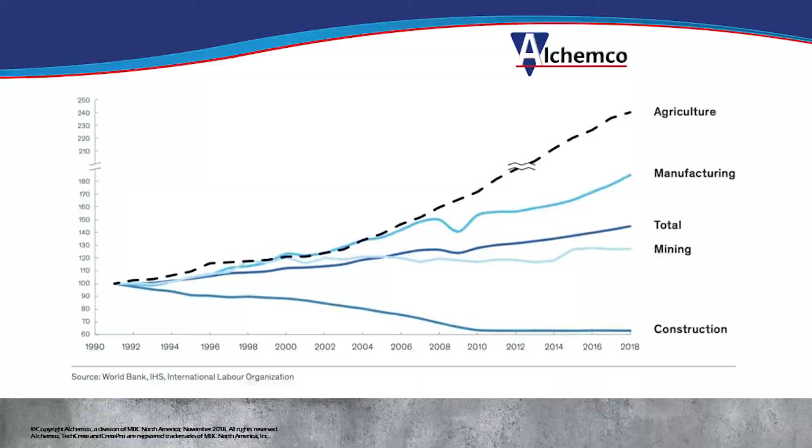Some industries like construction, it's not very good for us, as we can see here. This is very concerning. They did a study to try to understand why that was happening, and you guys are never going to believe why. It happens that construction has lower margins. This stuff of DOTs choosing the lowest bidder makes everybody work with lower prices, and if you have lower prices, you don't have margin to invest in innovation.

So no one is investing in innovation because there's no margin in the construction industry to try something new. And that's not the reality for other industries, as we can see here, agriculture or manufacturing. So construction loses a big opportunity to increase productivity, and it's very sad to see productivity going down after 30 years just because margins are so low that there's no room for innovation. It seems like I'm talking against innovation, but actually it's the other way around, I'm talking in favor of innovation.

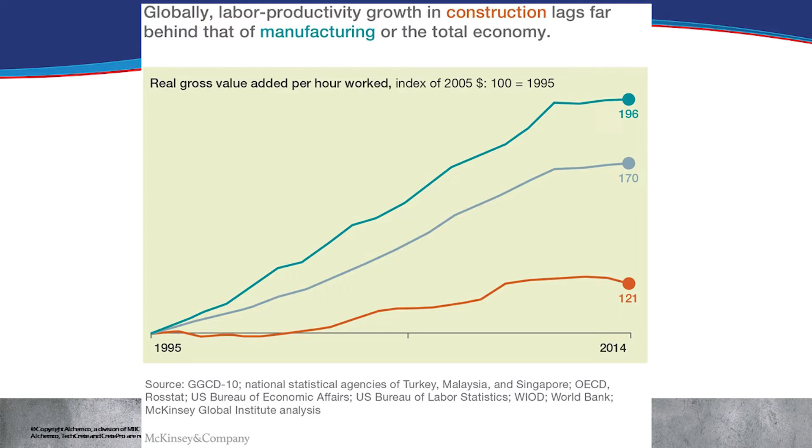Here, these are from the United States, and this one is global. So even in both scenarios, they're not good. Construction is also not good internationally.

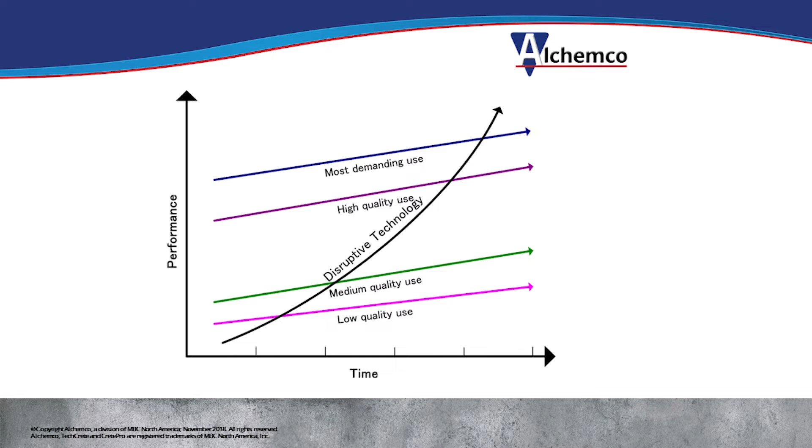Yesterday I mentioned about 2 types of innovation. I mentioned incremental innovation, so there's a first product that's low quality, then a second product that's medium quality, and the product gets better. We also mentioned disruptive innovation, where in the beginning it's completely different from the way we used to do business before, but now we got used to this new innovation.

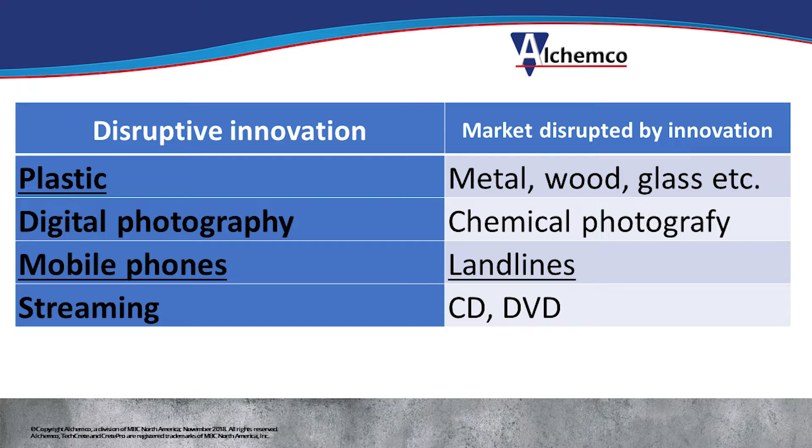Let me give you some examples. We had metal, wood, and glass, and then we created plastic, and there are way more utilities to do with plastic than we had before. And then, as you can see here, we have chemical photography replaced with digital photography, landlines replaced by mobile phones, and CD or DVD replaced by streaming. So when we talk about innovation, this is usually what we see.

It's very interesting with digital transformation, here are some numbers - either industry size or savings. Digital transformation is 100 trillion, e-commerce is 22 trillion, artificial intelligence over 15 trillion, climate change mitigation is 7 trillion, and a forever lasting concrete is 1 quadrillion dollars.

I'm not American, I'm not sure if quadrillion dollars exist, but I thought it was an easy, funny thing to say. When I typed 1 quadrillion into the presentation, it reminded me of Austin Powers saying 'one million dollars.' I just thought it was funny.

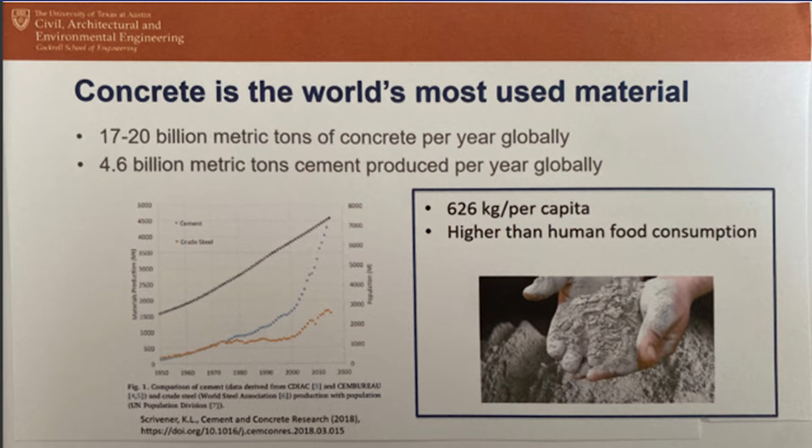Regardless, even though forever lasting concrete might not be worth a quadrillion dollars, concrete is the most used material in the world. So if we're able to make concrete last longer, we're saving taxpayers' money, making structures last longer, and we can use our budget to build new structures. That being said, let me start my presentation.

Alchemco produces waterproofing materials, spray applied waterproofing products. One of our materials won the Most Innovative Product award in 2020, just a couple years ago. We are a global company with projects in 75 countries over the last 45 years.

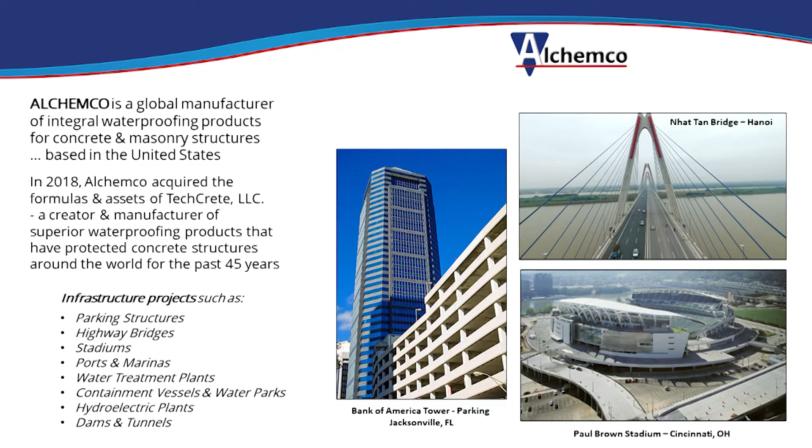A few years ago, in 2018, we bought a company from North Dakota, TechCrete LLC. That was the company that created this technology, back in the 70s, which we're presenting today. We have different types of projects, from bridges to airports to commercial buildings, all over the globe - water parks, aquariums, monuments. So we have a lot of different projects.

This is the technology we are part of with the ITD, this gel technology. I showed you guys yesterday the gel formation, and I have the video here for those who weren't here. This technology is a gel - a liquid that penetrates the concrete about half to three-quarters of an inch and forms a flexible barrier inside the concrete.

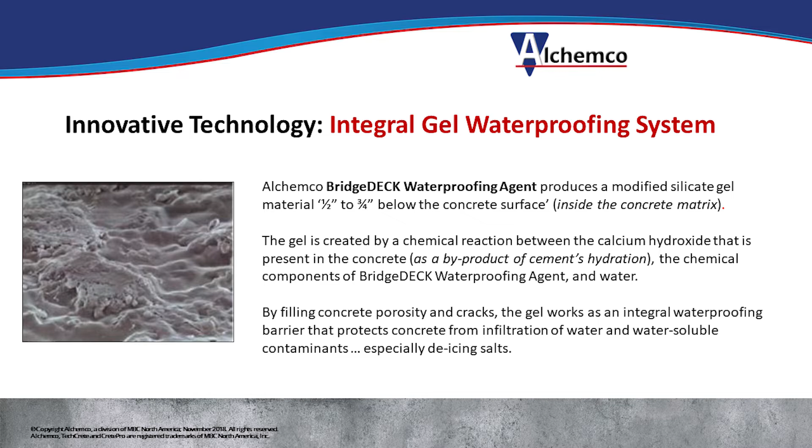A lot of the issues we face with other technologies happen because they sit on top of the concrete - that doesn't happen with this technology. And being flexible, being a gel, it handles thermal stress very well.

This is a video of the chemical reaction. If you want to see that live, we have material at our booth to show you the reaction. We use a clear cup to show the reaction that happens inside the concrete - as you can see, immediately when one product contacts the other, it forms this white gel, and this white gel is exactly what seals the pores, cracks, and capillaries of the concrete.

Often when we talk with DOTs, they have a bunch of different questions, as our technology is not a silane, not an epoxy overlay, not a methacrylate - it's a technology they don't know where it fits. So here are a few of the questions we often hear from DOT engineers.

The first question, probably a DOT's major concern, is how long do I have to close a bridge? It's a very short application period - the lane is often open within hours, 4 to 6 hours. So it's a very short lane closure. The next question is about life expectancy - how often do I have to go back to that bridge to reapply the material?

Our materials last a long time. Depending on the product, they last up to 25 years, and we have another technology that lasts even longer.

The other question is whether it's a flexible or rigid product. This product forms a flexible gel. The majority of our projects outside of bridges are parking structures, rooftops, areas with thermal stress - and if you have thermal stress, you need a flexible waterproofing, otherwise it won't handle the stress.

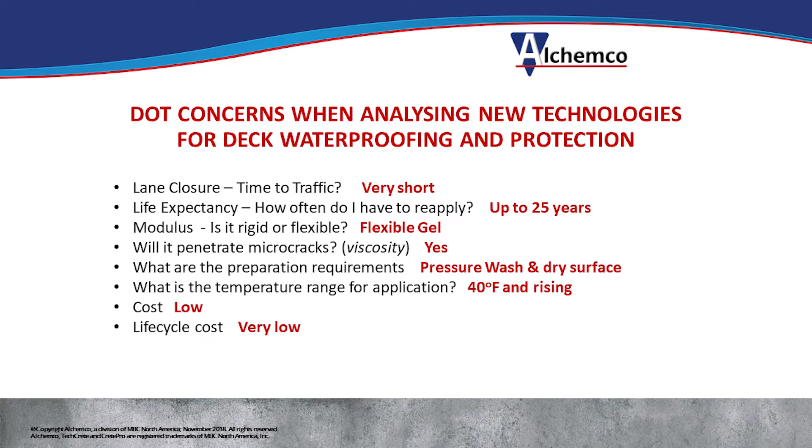The other question is about viscosity, how thin the product is. This product penetrates cracks and micro-cracks, so it's a very fluid material and penetrates the concrete very well. Prep is another major concern.

It's a very easy preparation, often just pressure wash the structure, and that's clean enough to receive this penetrating waterproofing material. The application temperature is 40 degrees and rising, so we cannot apply in freezing temperatures, which might be a concern for a few territories depending on when we are applying.

It's a low-cost material, and yesterday we were talking about the life cycle cost. Not only is the material a low-price product compared with other technologies, but the life cycle cost is very low. Often when discussing the cost of this system, the number one item is lane closure, the single most expensive item on a bridge application. So if they're able to do this every 25 years, it becomes a very low life cycle cost.

Here are some benefits and interesting points about this technology. This material has the ability to seal 2 millimeter cracks, and 2 millimeters is the width of a car key. So if you see a crack in the concrete that you can put your car key inside, this material would be able to waterproof that crack, so water will no longer penetrate.

Also, the material remains reactive inside the structure. Every time there's water, for example from rain, it's going to reactivate the material and give it the ability to seal future cracks, cracks that happen after the application. We know that concrete is going to crack, so that's the sustainability part of the material, that it keeps improving with time.

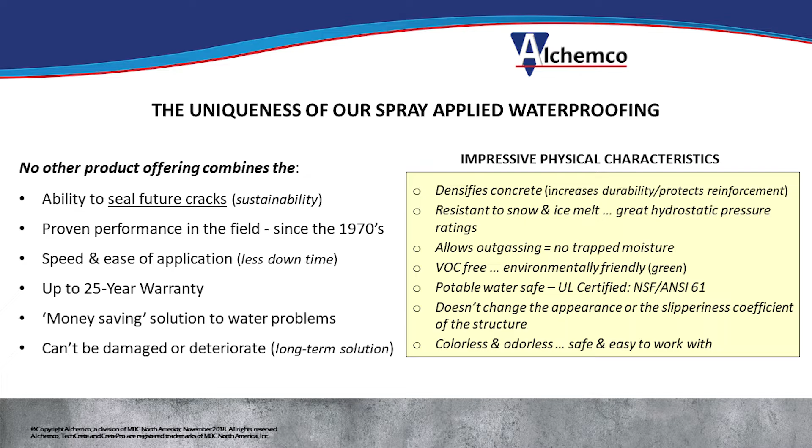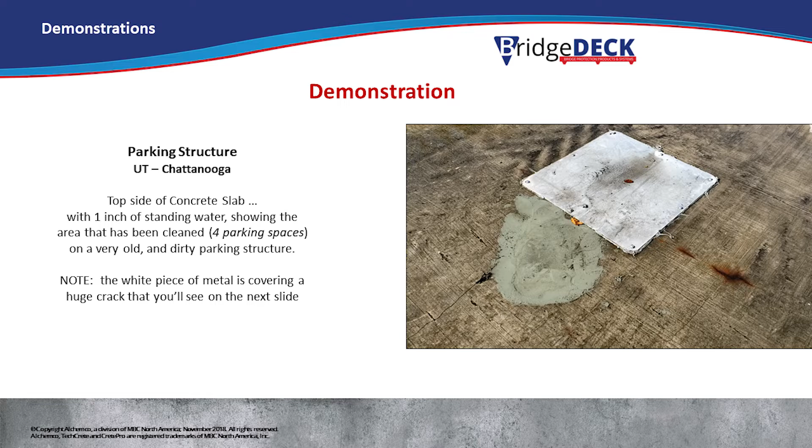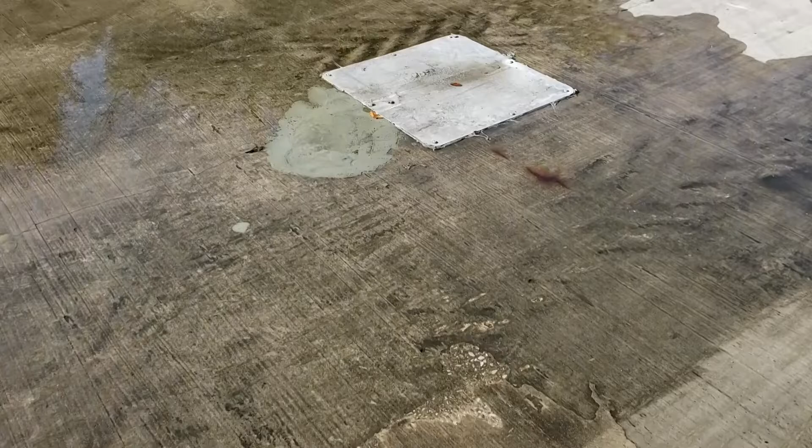Here I have an interesting video. You can see this is a parking structure in Tennessee where you can see a lot of different cracks. Let's see, laser pointer. So you can see here the cracks, and we saw the metal plate in the beginning. Now there's probably 1 or 2 inches of water on top of that.

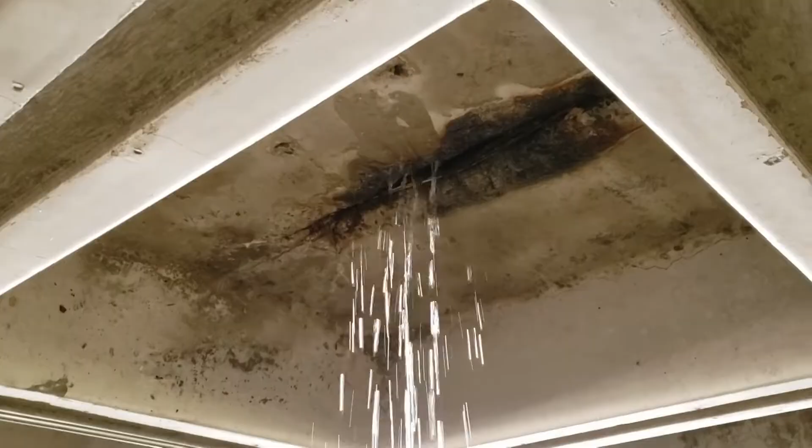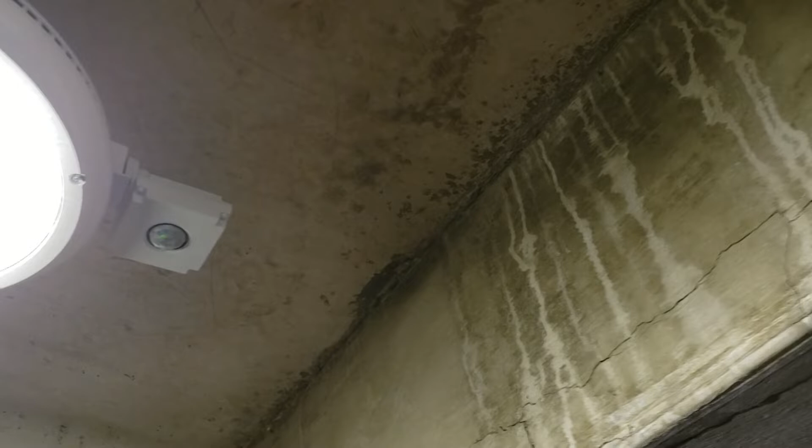Now we're going to see the underside. We're able to see on the underside that we have water leaking, so we know there's water on top. But what's very interesting is that all the cracks that were leaking before are now completely dry. That's exactly what I'm talking about, the capability of this technology to seal existing and future cracks in the concrete. So we see all cracks and they are completely dry. This is a great way to see the product's performance over time.

If water is not penetrating the concrete, you already know that you're not going to have corrosion. In order to have corrosion, we need water. So the de-icing agents we use, the salts, all of that would damage the structure, but that's no longer going to happen because water is not part of that reaction.

This is an interesting test that was done back in the 80s. It's a parking structure where this product was applied in 1988.

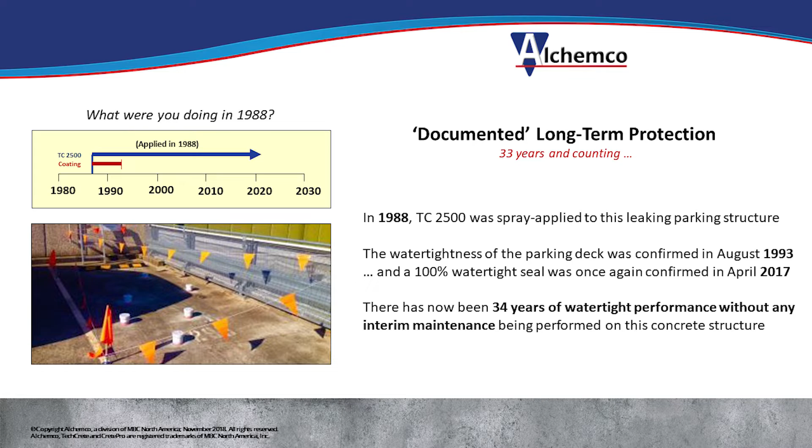So it was a leaking parking structure. They had a bunch of cracks. After the material was applied, they did the first test in 1993, 5 years later, and were able to verify the area was completely dry. Then they did a new test 29 years later, in 2017, and the area was still watertight, and the cracks that were leaking back in the 80s were still dry. Nothing was done - we had testimony from the owner of this parking structure confirming nothing was done, and the area was still watertight.

So when we talk about the longevity of this technology, and a DOT not having to go back to a bridge to reapply something that you'd probably have to reapply every 3 or 5 years, this brings a lot of value to DOTs. We have 3 different products with the same base technology, and the main difference between them is the crack sealing ability and also the durability of the product, the reapplication period.

So if you have a bridge that's in good shape, you don't use a lot of de-icing agents in your territory, and there aren't a lot of cracks, you can go with one product that has a 15-year reapplication period and is able to seal a 1 millimeter crack. And we have up to the waterproofing product - that's the bridge deck waterproofing agent - with a 25-year reapplication period and the ability to seal 2mm cracks.

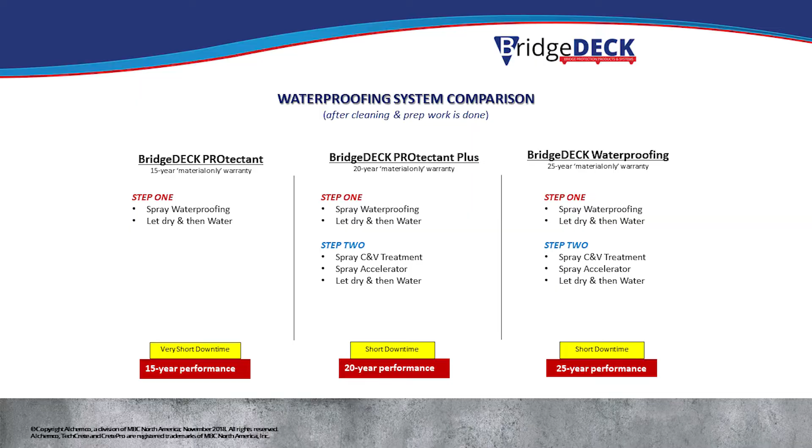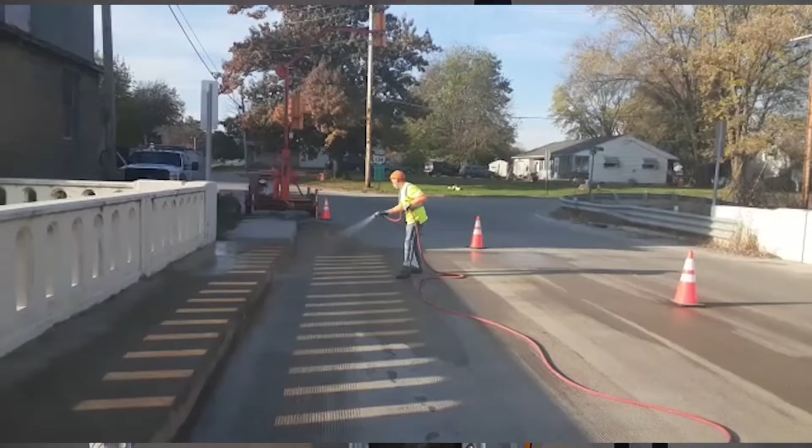I'm going to show some videos of the application in different states. We have different ways to apply, but usually the product is spray-applied using either a backpack sprayer or some other equipment I'm going to show. This one here, the application rate is about 20,000 square feet per hour, so it's a pretty fast application. The product dries, depending on the environment, in 4 to 5 hours, or if it's a warmer day, 2 to 3 hours.

And after the application, we use water. This product has enzymes, and this is one of the interesting things about it - these enzymes need water to make the first reaction with the concrete. So after applying the product, we use water to help it penetrate further and also to start the reaction with the concrete.

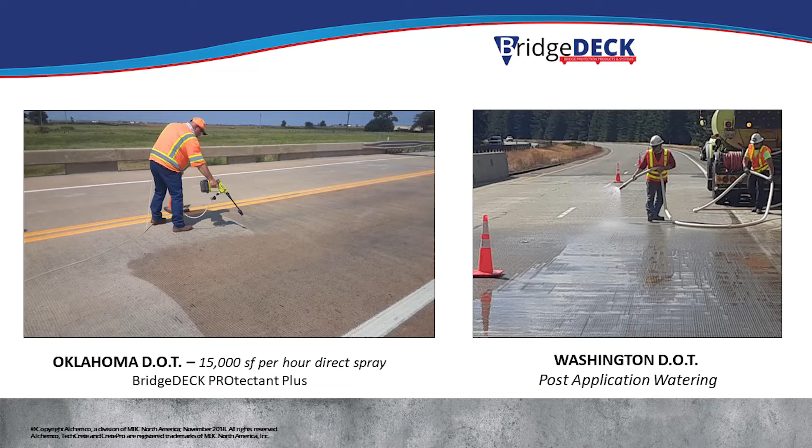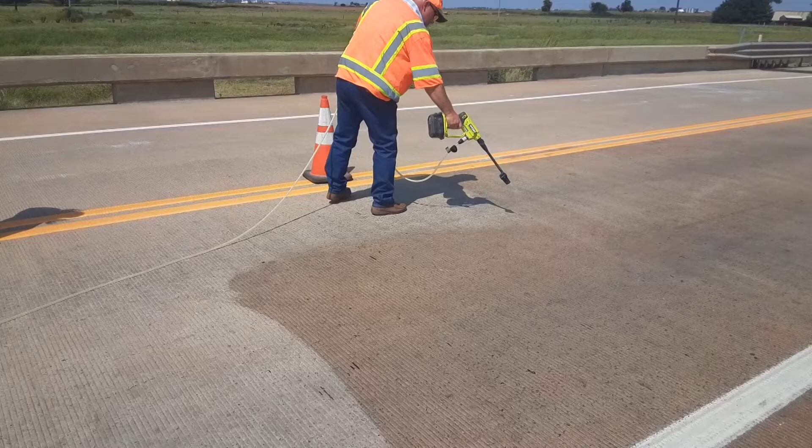Here's Oklahoma DOT using this equipment. What's interesting about it is that your maintenance guys don't have to carry a backpack sprayer with 4 gallons of product. They just use the sprayer with the hose inside a bucket.

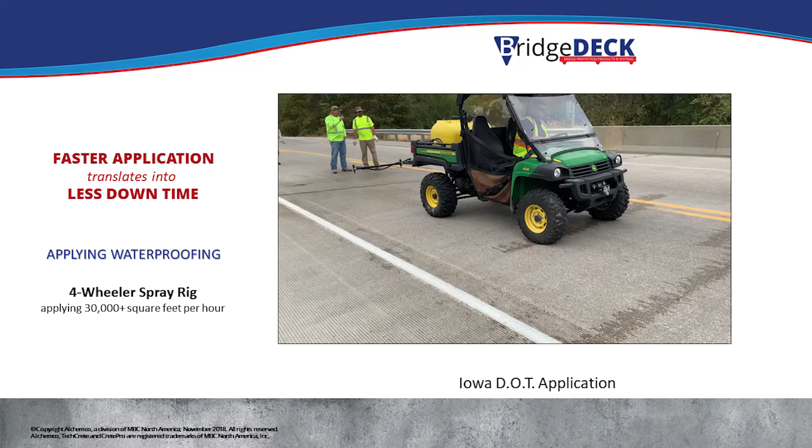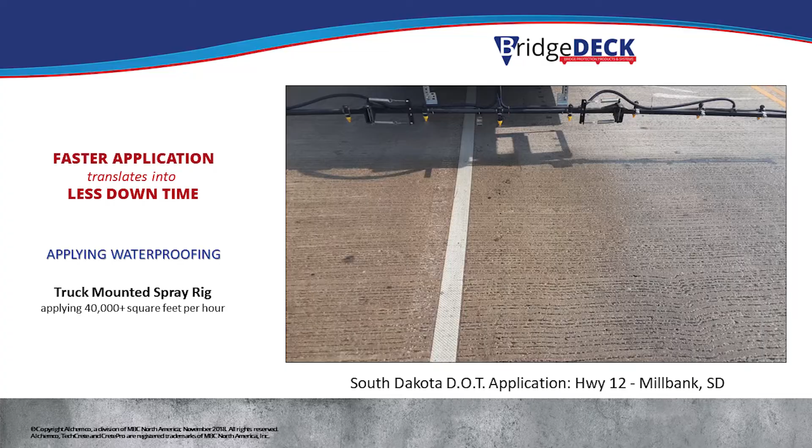This is Iowa - they're using a 4-wheeler to apply the material. Again, there are different ways of applying, and in this fashion it's about 30,000 square feet per hour, so still a pretty fast application. This is South Dakota, using this spray rig and their equipment, about 40,000 square feet per hour - pretty fast application as well.

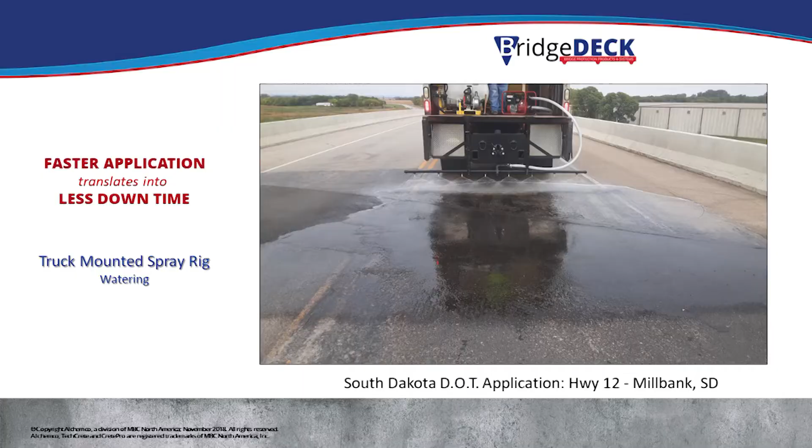As I mentioned, after the spray application you spray water, and water is exactly what starts the reaction. So here's water application - some people ask if this is product application. I wish, but it's not, it's just water. This is exactly to help the material penetrate further.

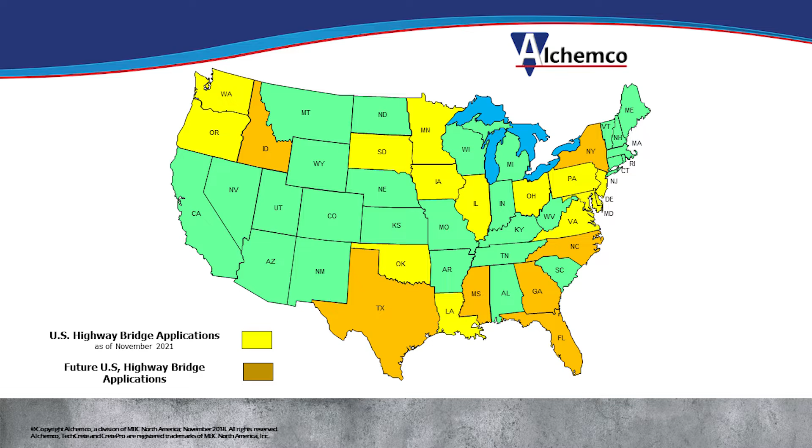These are some of the states where we've applied this material: Washington DOT, Minnesota. This is the test, part of the ITD. As we mentioned before about the ITD program, the idea is to test before the application, after the application, at 1 year, 3 years, 5 years, 10 years. So we're able to show the DOT that the product is still there, the product is reactive, and we're protecting from, for example, chloride ions. With the different technologies we have across different products, this test lets us show exactly the increase in performance of the structure.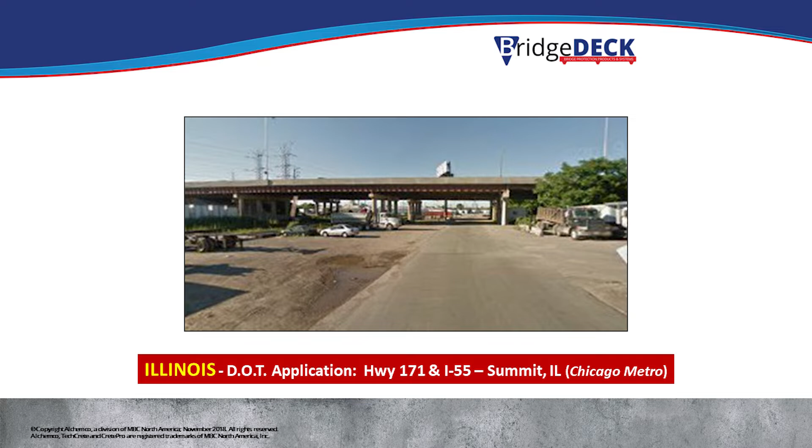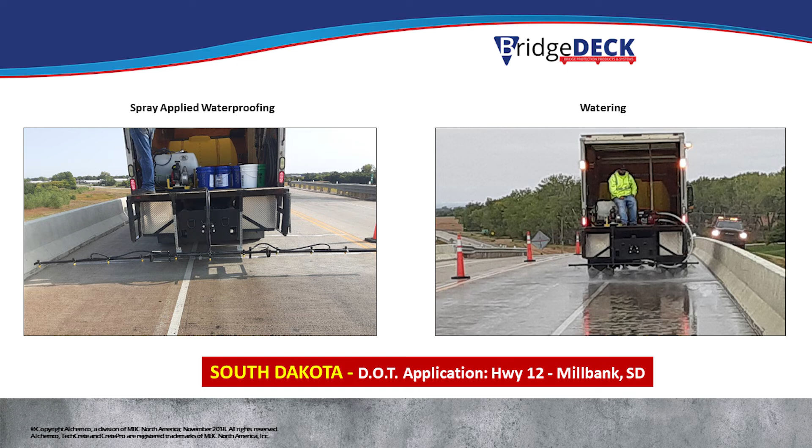So we have Illinois, the spray application here, Ohio with different bridges, that's Iowa, South Dakota. Again, my goal in showing different states is really to show that there are different ways of applying the product. Regardless of the equipment you use, it's going to range between 3,000 square feet per hour per person up to 40,000 square feet per hour per person. So it is a fast process that brings a lot of speed to any given bridge.

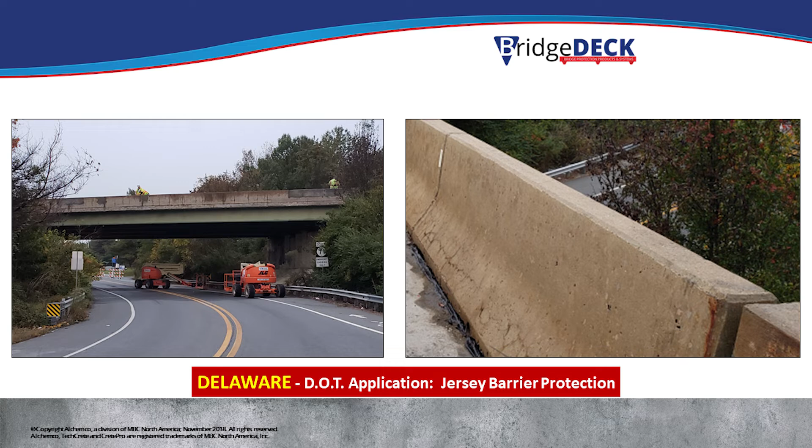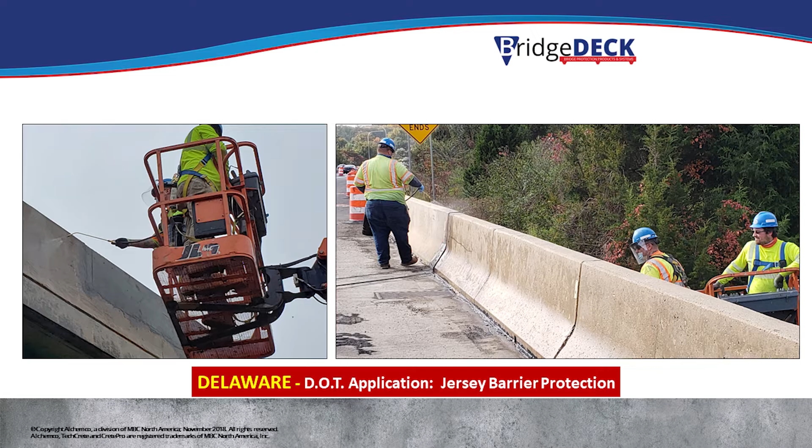You don't have to go back to that bridge to waterproof. The product can be applied on vertical and horizontal surfaces. Here we have Delaware, applying on guardrail barriers. The material shows the application on both sides. You can see they applied on one side, then on the other, and the material penetrates the same on horizontal or vertical. This was a bridge here.

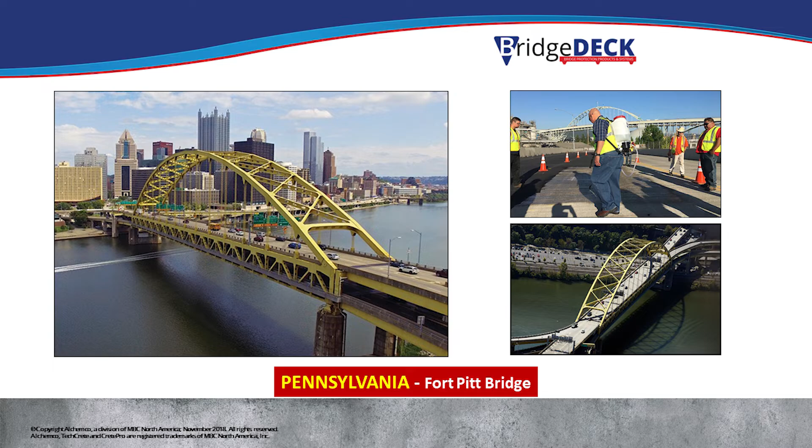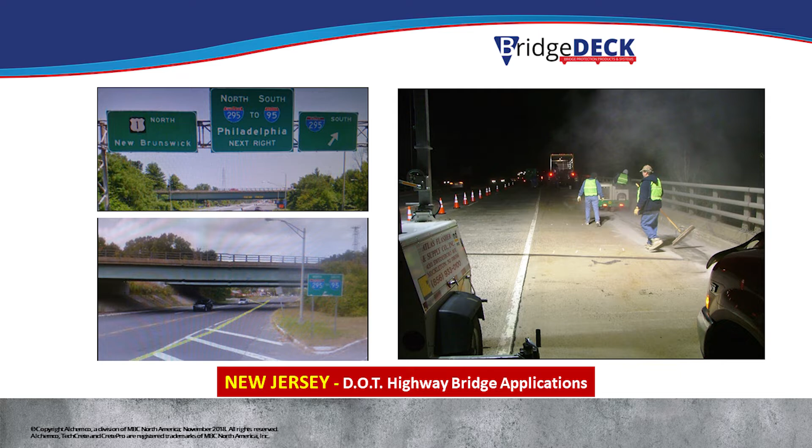Usually we spray on the entire structure. In this case, they only flooded the cracks of this bridge, the Fort Pitt Bridge, with our technology. Here we have New Jersey DOT, and this was a night application.

So to summarize and finish this presentation, this technology is different from silanes, siloxanes, epoxy overlay, and methacrylate. It's not the same type of technology, and it's going to last longer than many of the technologies available on the market. It's a green product, as I mentioned, with a potability certificate. There are no VOCs, so there's no smell. This material is able to seal 2 millimeter cracks, the width of a car key.

The material does not trap moisture inside the concrete. What's interesting is that when you don't have water, the gel I mentioned is going to shrink. When the gel shrinks, that's exactly when the water trapped inside the concrete is able to evaporate. So you're able to remove any water that was trapped inside the concrete.

Due to the permeability of the material, it has high resistance to chemicals and chloride ions. It increases the hardness of the concrete from 6 to 8 on the Mohs scale, densifying the concrete as well, and increasing the compressive strength. Our tests show about a 40% increase, from 3,500 psi to 5,000 psi.

As I mentioned, this is a waterproofing product, and we have a water pressure test of 1,300 feet of water pressure with no damage to the waterproofing and no leaking, which is really unheard of. I don't know any other technology that's able to handle such strong hydrostatic pressure.

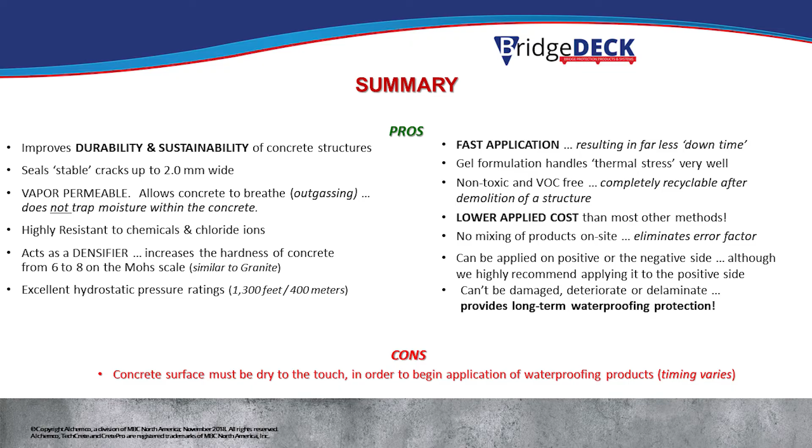However, we do recommend applying on the positive side every single time. In order to apply the material, the concrete should be dry, meaning 10% or less moisture content. The rule of thumb is 24 hours with no rain.

So that's it. Any questions?

So the question is, how long can we wait to apply the material on new concrete? The material can be applied after 14 days. So if you're placing new concrete, 14 days later you can apply the material. If it's an existing structure, it really doesn't matter.

We did a historic bridge in Maryland that was, I think, 100 years old, and all over the globe we've done older structures. So it doesn't matter if it's old, that's not a problem for the technology. But if it's new, it should be 14 days or older.

I got a question regarding scaling from chloride. Have you seen in your tests on parking lots or bridge decks where you've applied the product, that concrete scaling from chloride has reduced, or has it had an effect, positive or negative? Sure, thank you for that question.

When it comes to issues that lead to premature deterioration of concrete, they happen mainly due to 2 or 3 reasons: water, chloride ions, and free calcium available in the concrete. What's going to happen with this technology is as soon as this product penetrates the concrete, it's going to react with the calcium.

So now we no longer have the free calcium available, and as we don't have the free calcium, we're not going to have carbonation, and we're not going to have calcium leaching or anything like that. The second step is the gel formation that we saw on the chemical reaction. When this gel formation happens, we block water from penetrating, so we don't have new water penetrating the concrete in the structure. So if we don't have chlorides, if we don't have the free calcium, and if we don't have water, a lot of the issues that happen, like delamination, are no longer going to happen because we are removing the ingredients that lead to this deterioration. As we are removing that, these deteriorations are not happening. So the question is how deep the product penetrates, and it penetrates between 1/2 and 3/4 of an inch into the concrete.